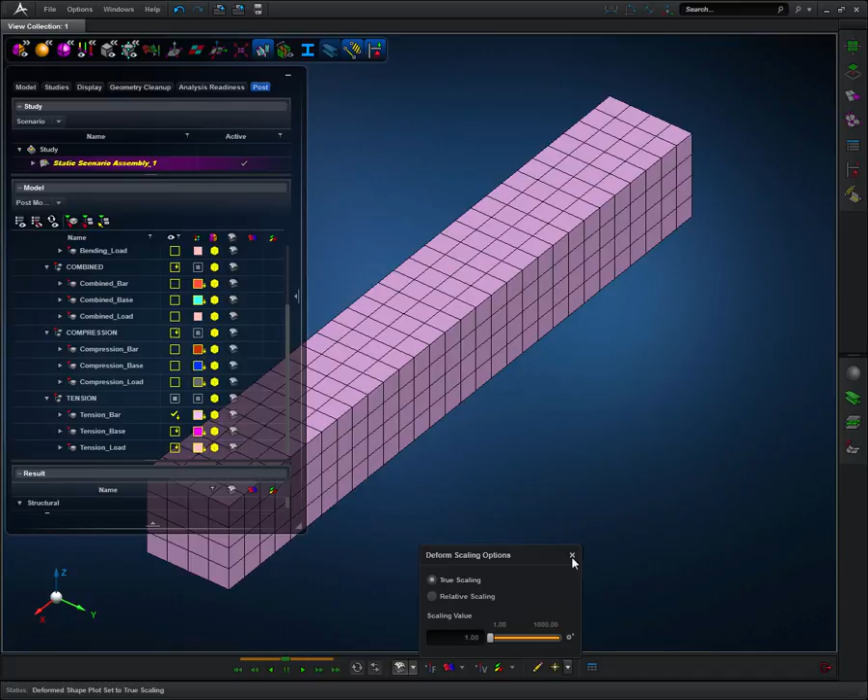Here, we see the deformed shape of the bar in tension. In this case, the deformed shape is exaggerated. We can change the scale by changing the deform scaling option. Let's try true scale. Now let's show the fringe plot by clicking the fringe icon. If we hover the cursor over the spectrum, we see that we are viewing von Mises stress. Let's change it to X component.

We see that the stress value is between 28.9 and 37.1 kilopascals, which correlates to our closed form solution of 31.25 kilopascals. We can also change the result quantity to show displacements translational, which also matches our closed form solution value of 1.3 times 10 to the negative 7 meters.

Now let's look at the compression case. Hover over the visibility icon on tension bar and select the empty box to hide it. Then hover over the compression bar and click on the check. Fit the part into the screen by pressing the right and left mouse buttons simultaneously. Here, we see the deformed shape of the bar in compression. Change the fringe plot to show stress again by hovering over the spectrum and changing the quantity to stress.

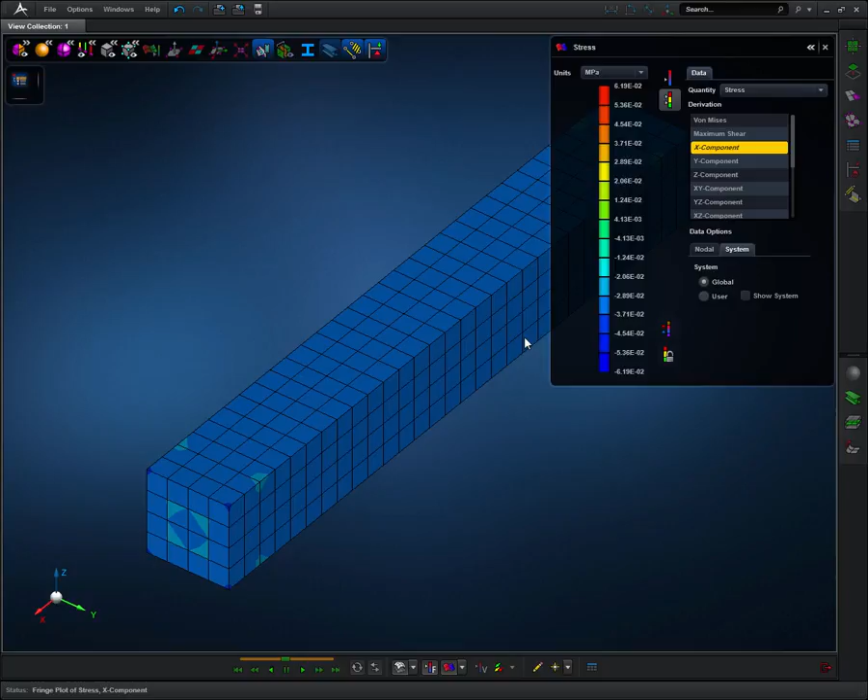We see that the maximum stress falls between negative 28.9 and negative 37.1 kilopascals, which correlates to our closed form solution of negative 31.25 kilopascals. If we change the result quantity to show displacements translational, this also matches our closed form solution value of negative 1.3 times 10 to the negative 7 meters.

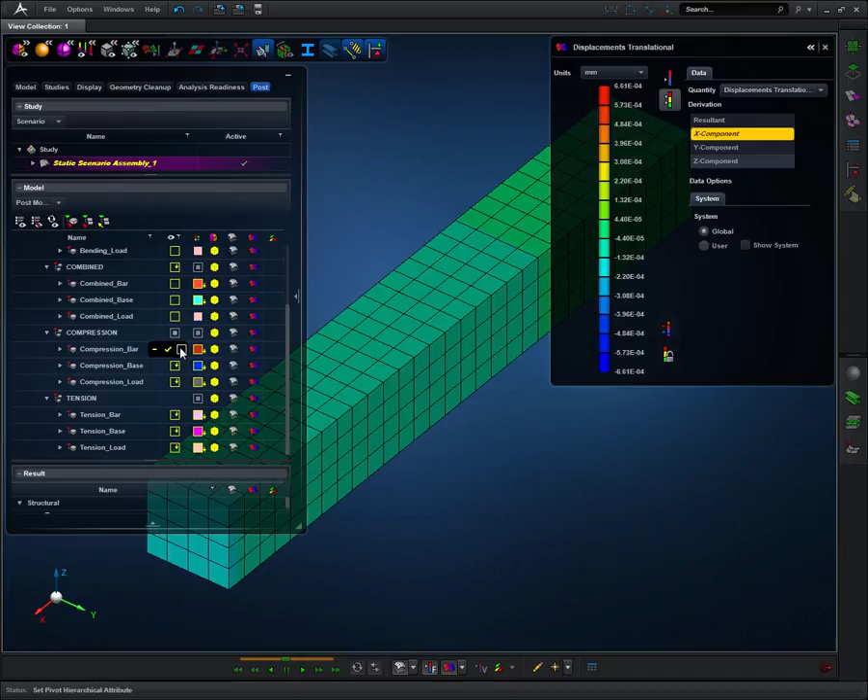Now we will repeat the same steps to show the results of the other 2 cases. Hover over the visibility icon on the compression bar and select the empty box to hide it. Then, hover over the bending bar and click on the check. Fit the part into the screen by pressing the right and left mouse buttons simultaneously. Let's turn back on relative scaling in the deform scaling options. Here, we see the deformed shape of the bar in bending.

Let's show the fringe plot of the X component of stress again. Here, we see that the top is in compression with a value of negative 21 kilopascals, and the bottom is in tension with a positive value of 21 kilopascals, which matches our hand calculations. If we change the result quantity to show displacements translational and then select Z component, it also matches our closed form solution value of 6.7 times 10 to the negative 7 meters deflection of the tip end.

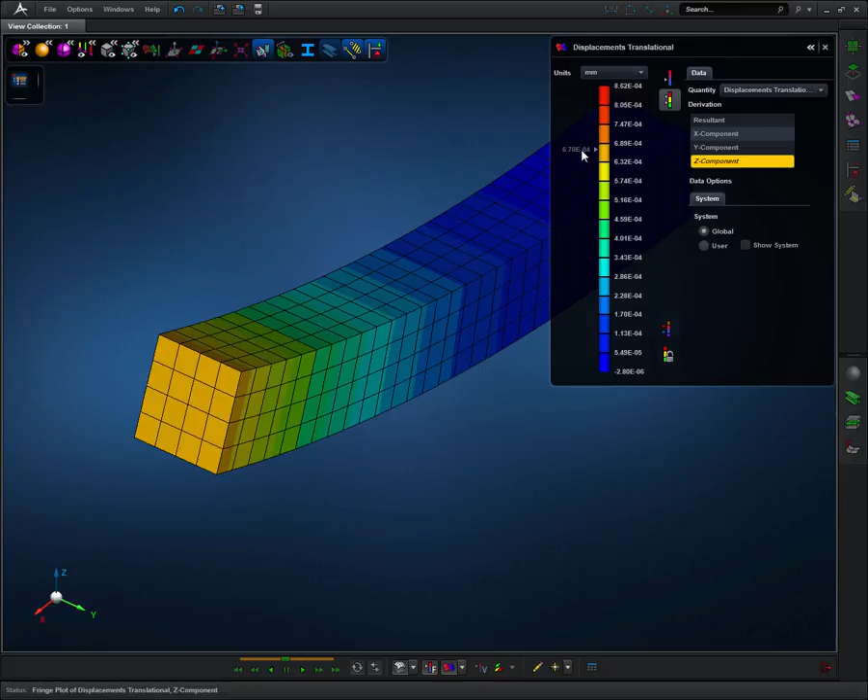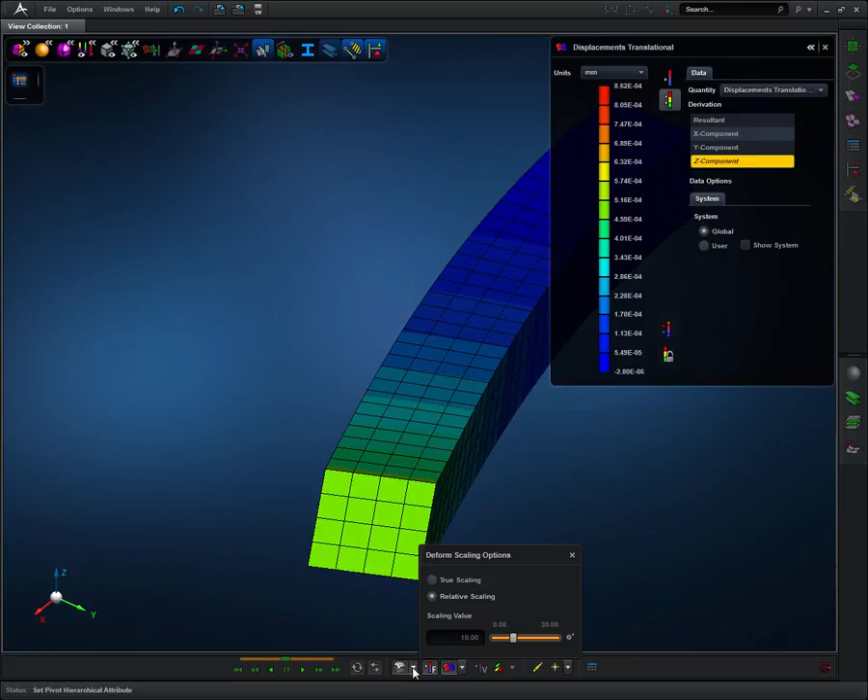Finally, let's look at the combined case. Hover over the visibility icon on bending bar and select the empty box to hide it. Then, hover over the combined bar and click on the check. Fit the part into the screen by pressing the right and left mouse buttons simultaneously. Let's turn back on true scaling in the deform scaling options. Here, we see the deformed shape of the bar for the combined case load.

If we hover over the area of the spectrum, we see that we are viewing x component of stress of approximately 59,800 pascals. This is slightly different from our hand calculations because in our closed form solution, we assume the forces are applied in such a way that they are perfectly aligned with the centroid of the beam. However, in the real part, due to the thickness of the tool, the forces aren't squarely aligned with the centroid.

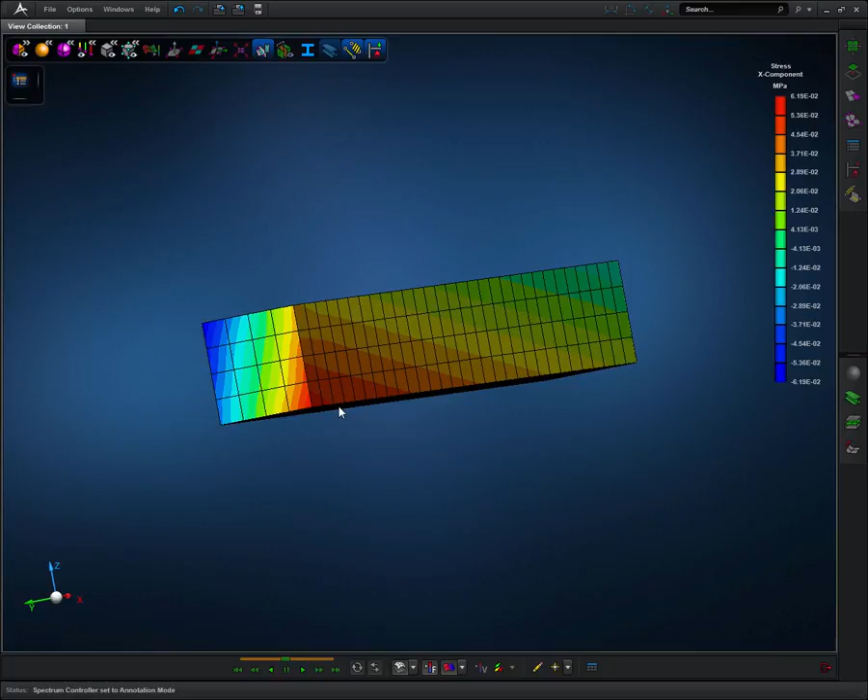Our calculations do not account for this, which causes the slight discrepancy between the displayed results and our closed form solutions. If we were to decrease the thickness of the paddle, we would find that we get closer and closer to the theoretical results.

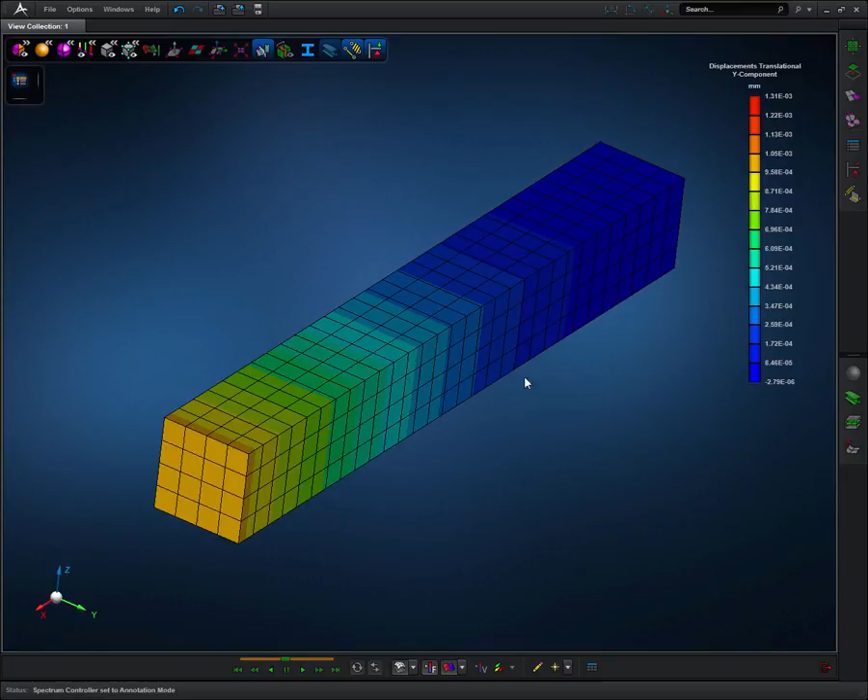Now if we change the result quantity to show displacements translational, we can show the displacement in the y direction, which is the direction in which the part most deflects. This matches closer to our hand calculations of 9.86 times 10 to the negative 7 meters. This concludes this demonstration.